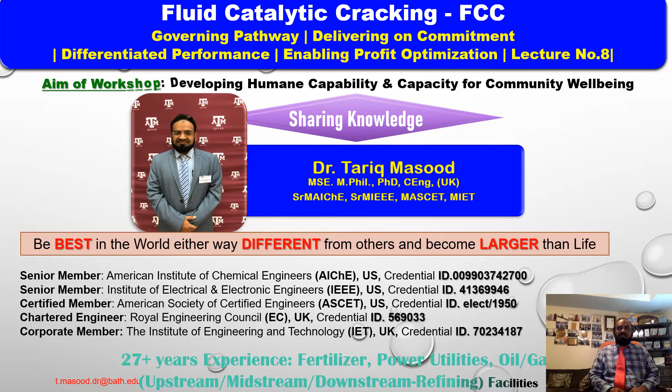Okay, today I'm going to discuss my lecture number 8. Fluid catalytic cracking FCC unit. Governing pathway, delivering on commitment, differentiated performance, enabling profit optimization process. Lecture number 8, key takeaway points. Fluid catalytic cracking FCC unit. FCC unit, major equipment, function and purposes.

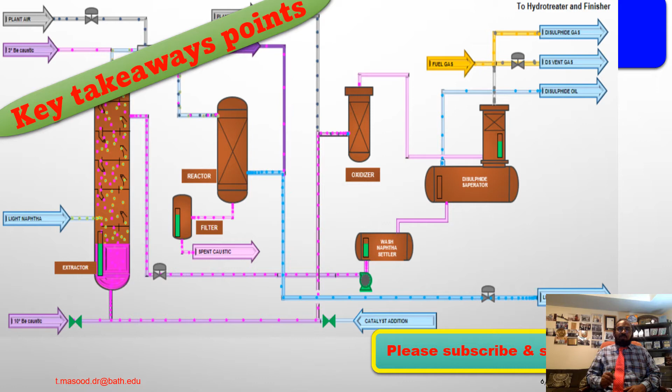Today we are going to discuss the reactor regenerator section. Number 1, catalyst storage hoppers, main air blower, regenerator assembly, cyclones, catalyst cooler, orifice chamber and flue gas slide valve, catalyst standpipe and slide valve, reactor assembly. So these are 8 topics we are going to discuss the next couple of days.

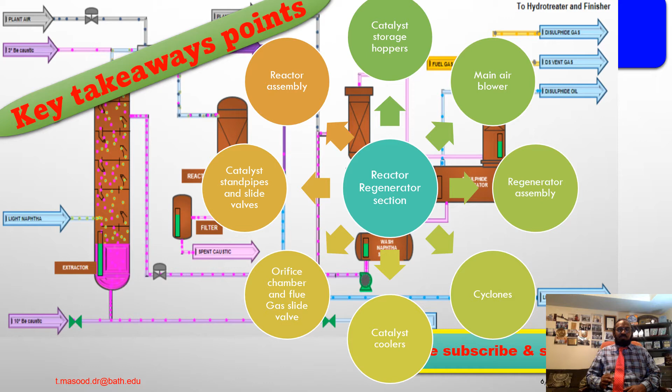Okay, catalyst storage hopper. The FCC unit is built with 3 catalyst storage hoppers. One is for fresh catalyst, one for low metal equilibrium catalyst, and one for high metal equilibrium catalyst.

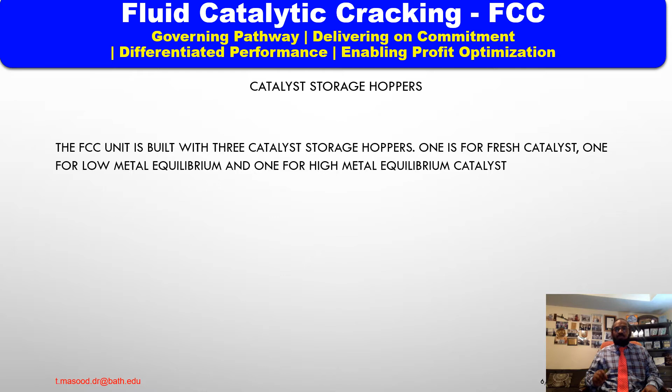Catalyst activity must be maintained during normal operation to a level compatible with the desired mode of operation. To achieve this, catalyst is loaded to the regenerator on a continuous basis and unloaded intermittently.

The 6-inch catalyst movement line from the upper regenerator is normally used to withdraw catalyst during operation and shutdown. A 6-inch line to the combustor is used to load catalyst during startup. A 2-inch line to the upper regenerator is used to continuously load catalyst during normal operation.

Air from the main air blower is used to pressure up the hoppers as this air is hot and dry. To fully pressurize the hoppers, instrument air is used. Used air must be free of any water to prevent formation of mud.

The catalyst loading lines have frequent air purges to help move catalyst and to assist unplugging the lines. These air purges are open slightly during the loading and unloading process.

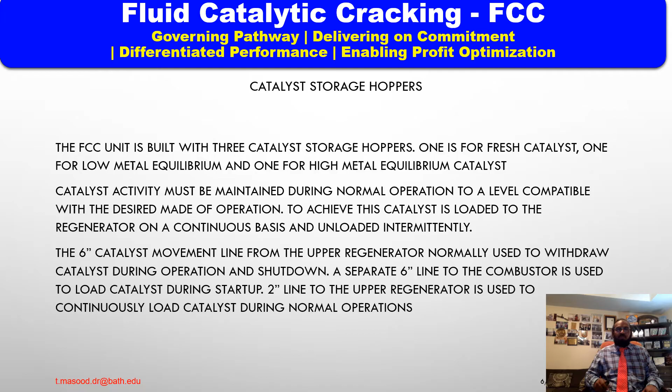Okay. Main air blower. The air blower is required to supply the necessary amount of air to burn the coke off the catalyst. Depending upon the mode of operation and other factors such as feed quality, the required air amounts to 10 to 14.5 kg per kg coke. This converts to about 330 to 500 normal cubic meters of air per cubic meter of feed.

A check valve is installed on the discharge of the air blower. It prevents a backflow of air or catalyst which could cause serious damage to the blower. Fluidized catalyst will easily flow back through the air heater if pressure is lost. If the blower starts to surge, the large volume of the regenerator must be isolated from it.

The check valve is a swing check valve. An air cylinder provides an assist for closing. It consists of a spring opposed by a small piston. Under normal conditions, instrument air is supplied to the piston which moves up to compress the spring, in case of instrument air failure to the piston. The check valve will remain open if the main air blower is in service, but the pressure drop across the check valve will increase.

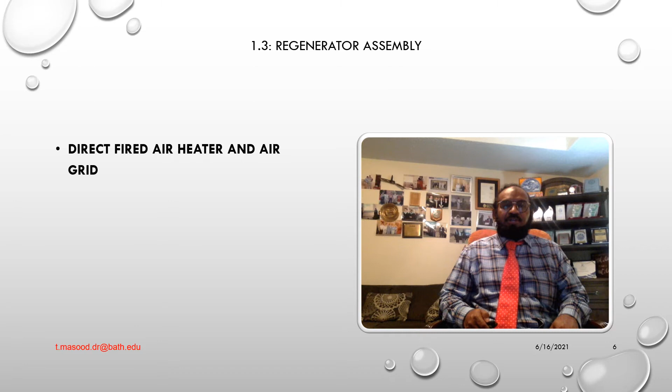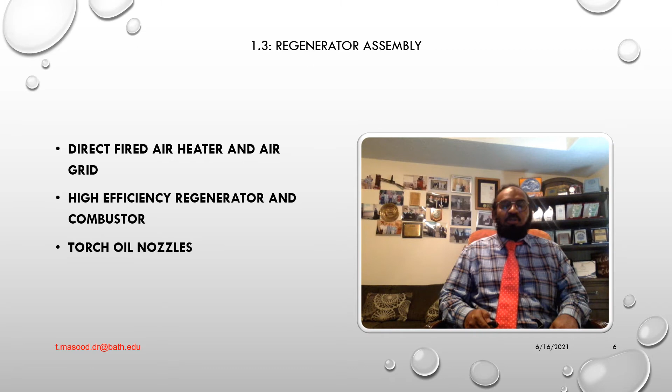Okay. Regenerator assembly. First is a direct fired air heater and air grid. Second, high efficiency regenerator and combustor. Number 3, torch oil nozzles. Okay, first we are going to discuss a direct fired heater and air grid.

This carbon steel internally insulated vessel heats air to the regenerator if necessary, for example, at startup. The burner is fired with fuel gas on heater discharge temperature control. The pilot burner is lit by a spark igniter. Air is directed to the burner by a large damper, controlled externally with a hand crank. Sight ports are provided for flame observation.

Air purges to the sight ports keep the glass cool and can be used to blow catalyst out of the ports if it backs up from the regenerator. A block valve is provided to shut off the ports when the burner is not being used.

The air leaving the heater enters the combustor via an air grid to properly distribute the air to the full cross section. The grid is designed as a pipe air grid which distributes the air through large laterals into smaller branches. It is designed for a total pressure drop of 0.05 bar G. Values of 0.035 to 0.07 bar are satisfactory.

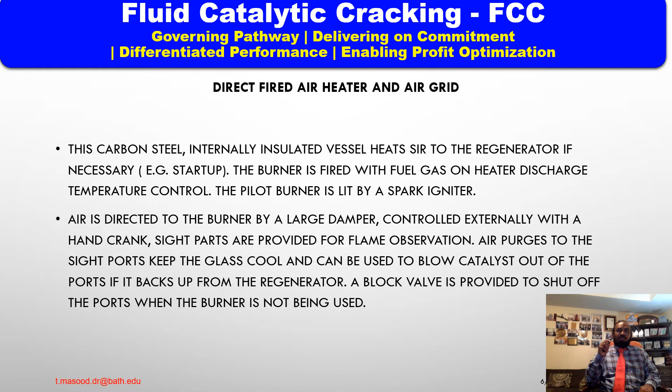Okay, next topic, high efficiency regenerator and combustor. The regenerator is an internally lined carbon steel vessel. The lining, called refractory, is a concrete-type material which is gunned onto the reinforcing support. This lining is necessary to protect the metal wall of the vessel from the high temperature at which the regenerator operates and should keep the outer shell of the regenerator below 343 degrees Celsius at all times.

Pressure taps and pressure taps used as level indicators are protected by instrument air purges. The purges provide a buffer between the catalyst-bearing gas in the regenerator and the small instrument taps which can easily plug. Connected lines which are also in hot service are refractory lined as well. The high efficiency regenerator approximates a plug flow burning profile for the catalyst.

The spent catalyst from the reactor mixes with roughly an equal amount of recirculating regenerated catalyst at the bottom of the regenerator combustor. The recirculating flow of the catalyst is necessary because the spent catalyst at 495 to 550 degrees Celsius is not hot enough to initiate and complete burning in a reasonably sized vessel.

The mixing takes place in the lower part of the regenerator called the combustor. The coke burns off the catalyst as it travels up the combustor riser with the air. There is initial separation at the top of the riser through a T-shaped outlet. The flue gas goes up to a two-stage cyclone system and on to energy recovery. The catalyst settles to a dense phase, from here it flows, part of the catalyst going to the base of the reactor riser and the rest back to the combustor.

The flue gas leaving the dense bed of the regenerator will carry off the smaller catalyst particles with it. Some of these settle back to the bed, others are carried higher. Before the flue gas leaves the regenerator top outlet, it passes a system of two-stage cyclones where most of the remaining catalyst is separated from the flue gases.

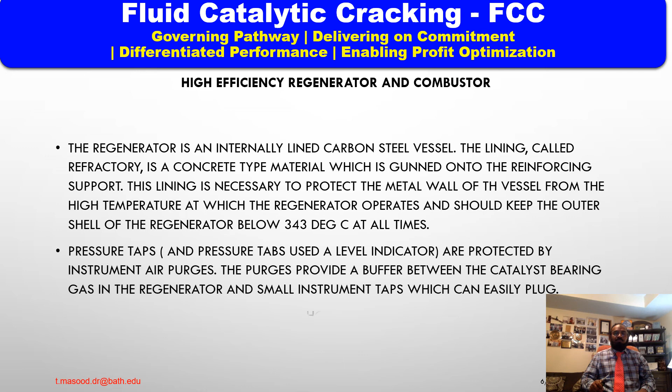Okay, torch oil nozzles. The combustor is equipped with torch oil nozzles. They provide a means of injecting heavy oil into the dense bed when extra heat is needed during startup. The oil is dispersed into the regenerator with atomizing steam.

When no torch oil is injected, a small amount of steam goes to the annular space around the nozzle and through the nozzle to prevent any catalyst build-up and to cool the tip of the torch oil nozzle. The torch oil nozzles are installed in a position such that the regenerator wall and nozzle are protected.

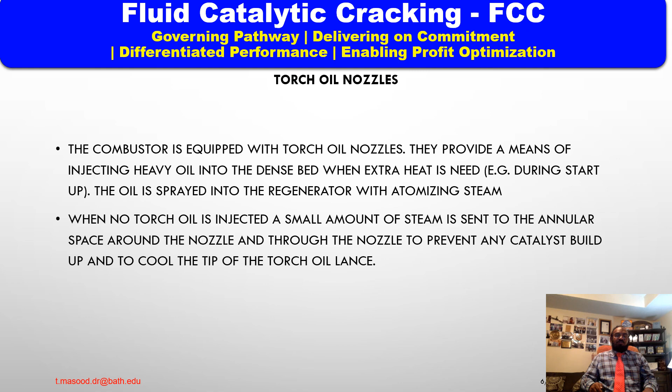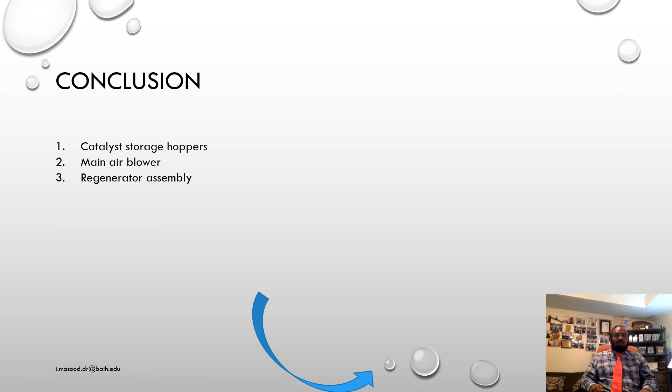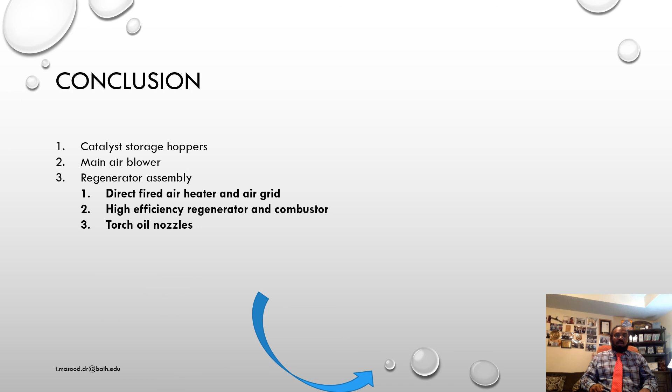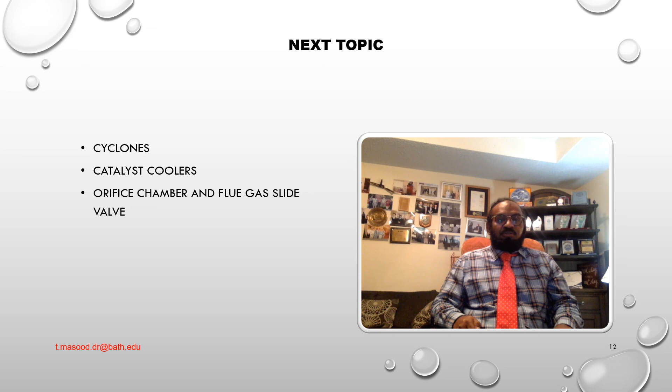Next, my slide is for the key takeaway points: catalyst storage hoppers, main air blower, regenerator assembly. We have discussed direct fired heater and air grid. We have also discussed high efficiency regenerator and torch oil systems. First will be cyclone, catalyst cooler, orifice chamber and flue gas slide valve, catalyst standpipes and slide valve, and reactor.